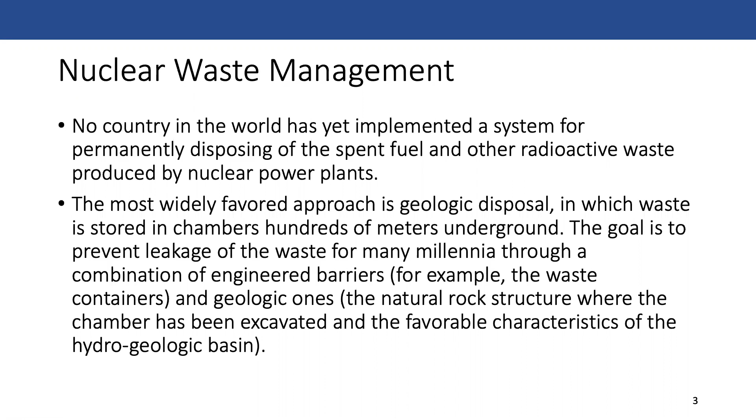But actually, the vast majority of nuclear waste today isn't being stored geologically. It's kind of just being stored on site. So they have these essentially giant swimming pools that house all of the nuclear waste. It's definitely a controversial topic, and one of the biggest problems is that no one really wants it to be close to them, and so it's been a struggle for the nuclear industry to figure out a permanent site to store the nuclear waste. So here's a schematic of a nuclear waste storage area.

Let's see. Okay, so there's a question. Oh yeah, a couple comments. Yucca Mountain. Yeah, that's the one that's being talked about a lot for nuclear storage. And there actually have been plans and developments of that site, but as far as I understand, it's not actually storing anything right now. And then another question: if we don't know how to deal with the waste, why do we still use it, other reasons than the energy needed? Well, that's probably one of the big reasons.

So there's a couple big benefits of nuclear. One, it's really clean. And two, from a technology perspective, it is able to turn on and stay on for a really long time. And because of the size of a nuclear plant, it produces so much power. It's really useful for what's called baseload power.

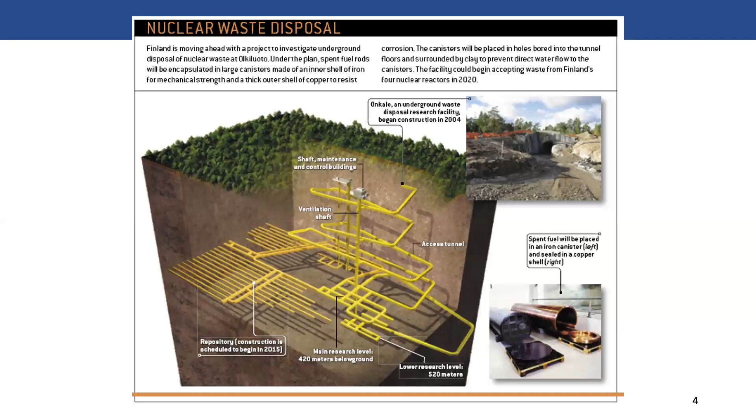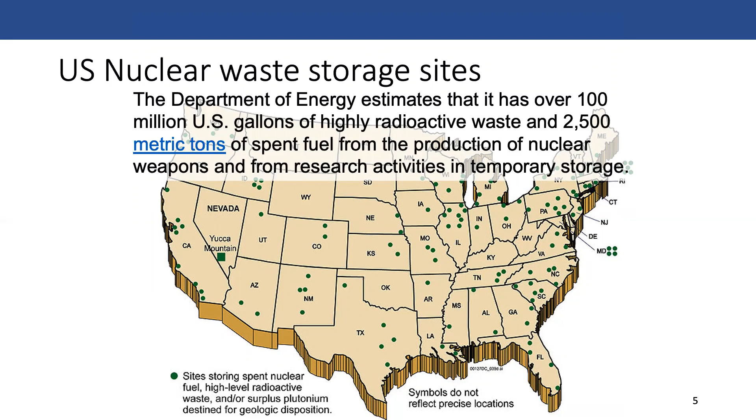So this is the one that I just mentioned, Yucca Mountain in Nevada. It was way back in the 1980s that it was designated as a nuclear waste repository. But even despite lots of money and many years to develop it, no waste is yet being stored. Definitely one of the most controversial aspects of nuclear power.

And I think whereas safety is somewhat of a concern from a public perception standpoint, I think nuclear in general is quite safe. But the nuclear waste handling is probably a perception piece that is kind of reflected in reality. And so because of public backlash, it's been difficult to try and open Yucca Mountain, and actually the Obama administration decided to terminate the program while looking at other waste sites.

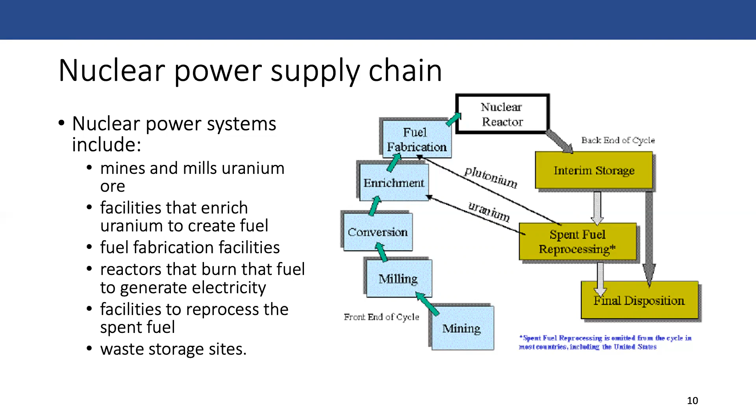So, pathways from going from nuclear power to nuclear weapons. If material gets stolen in certain parts of the supply chain, that can be a risk. You can also covertly sell the material, or divert a little bit of it, and that can be pretty difficult to keep track of, especially if it's like a government level operation where you are promising not to build weapons, but you're in charge of managing the overall nuclear power.

And then there are some scenarios that people are worried about where if you've signed on to the Non-proliferation Treaty in order to get nuclear technology, to produce power from nuclear, you use that to stockpile some of the material, and then you just renounce yourself from the treaty, and use the technology you gained. So that's an additional worry.

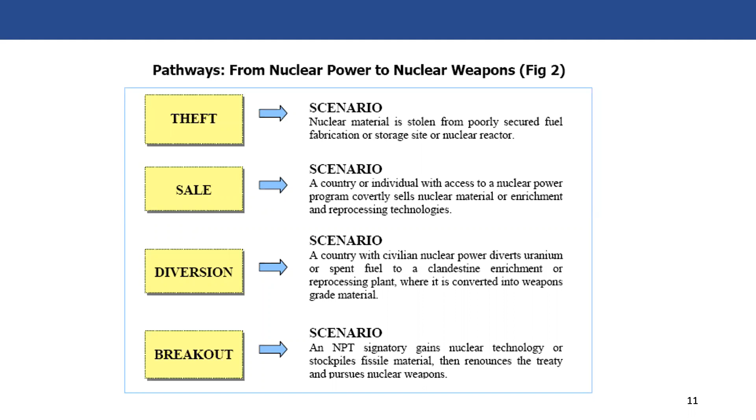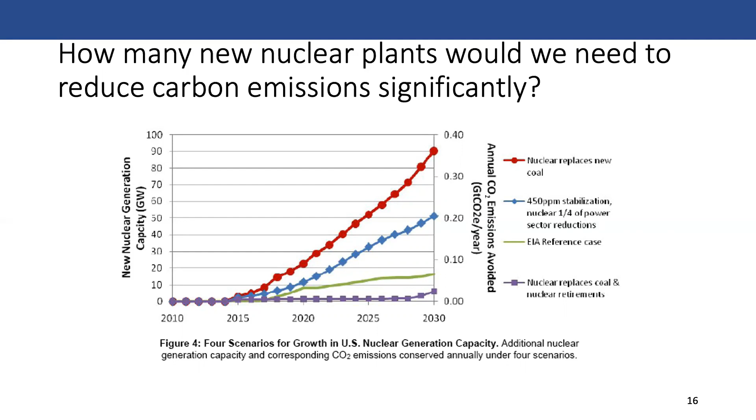In terms of how many new nuclear plants are needed to reduce carbon emissions, there's a couple different trajectories, and I guess we don't have to get into so much detail about what all the trajectories look like, but I will say that when you look at reports from like IPCC and similar types of things - for example, this next slide is a DOE scenario for a low carbon future - basically, all of these futures that people are looking at suggest that we need a lot more nuclear in order to achieve our climate targets.

The reason why that happens is you have a pretty hard time being able to provide electricity just from wind and solar and from renewables, where you do want a low carbon future, because of the intermittency issues where the sun doesn't always shine, the wind doesn't always blow. So you need some sort of stable power supply, and the one that's easiest to turn to that is totally clean is nuclear power, despite that it has many other drawbacks.

So this is just one example, but many projections of getting to low carbon futures have pretty significant developments in installation of new nuclear power. And that's definitely the opposite trend that we see happening these days.

Like I was saying, in Japan, for example, they've shut down the nuclear plants, although they're trying to get back to some of them. And then in Germany, for example, they've shut down their nuclear plants. And in California, even in our state here, we have shut down a number of nuclear power plants over the last decade or so. Actually, there's only one nuclear plant left in California.

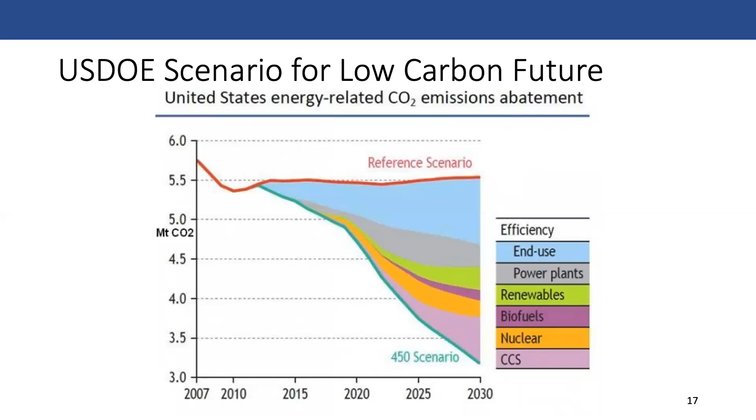When it comes to thinking about the technology, there are pretty different views for nuclear. So in the Obama administration, they wanted to really be able to look at all options and gauge what makes the most sense, guided by science. The Trump administration actually does also support nuclear, but I think it's more just on a technological basis. They want to revive the coal and nuclear industry.

The Federal Energy Regulatory Commission, which we'll talk a little bit about today, there was a nuclear plan that was put forth by the Trump administration and was rejected. This particular incident was to bolster coal and nuclear power plants with subsidies, and that was proposed in January, two years ago.

Essentially, it didn't really make much sense to do this subsidization, and as a result, it failed to pass the Federal Energy Regulatory Commission, which is in charge of developments in the electricity sector. So you can take a look at that in more detail. I have a link here.

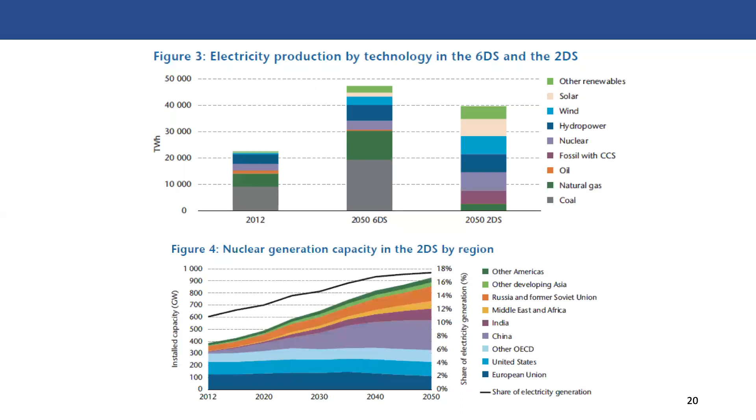So is nuclear green? The Breakthrough Institute has suggested that it's one of the best things to address climate change. You can rapidly scale it up. It's lower cost than renewables — maybe I might disagree a little bit about that one, especially these days where particularly wind power is quite a bit cheaper. It may still be technically economic over the course of its entire lifetime, better than solar. But again, those numbers are changing, and it's not only about the marginal cost, but the difficulty in installing new capacity is so big. If you remember from last lecture, these things are taking decades to build now, and that's an important consideration as well.

Others still see renewables as the best route to a near zero carbon energy system. But again, these things aren't so black and white. I think there's not really a silver bullet, and you'll probably need a mix of everything to get to what we need.

Okay, so that's a wrap up of nuclear power. So let's go ahead and dive right into the electricity grid. There's a lot of interesting stuff to talk about here.

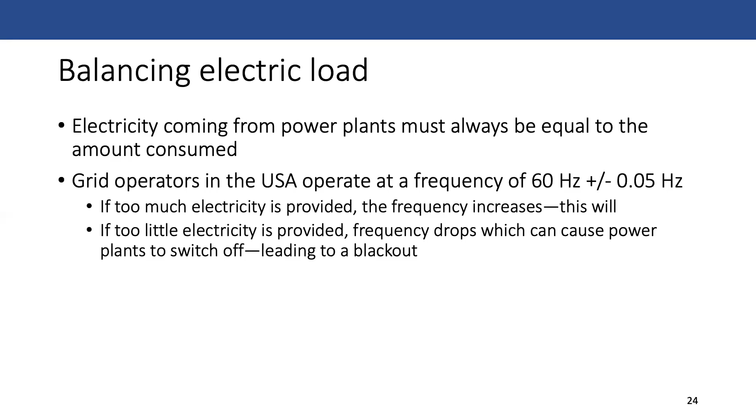And then as folks wake up, turn on their lights, go to work, turn on computers, turn on your air conditioning, all that good stuff, your electricity demand will increase over the course of the day, and then will sort of decrease over time as you wind down. And then you've got this sort of cyclical process.

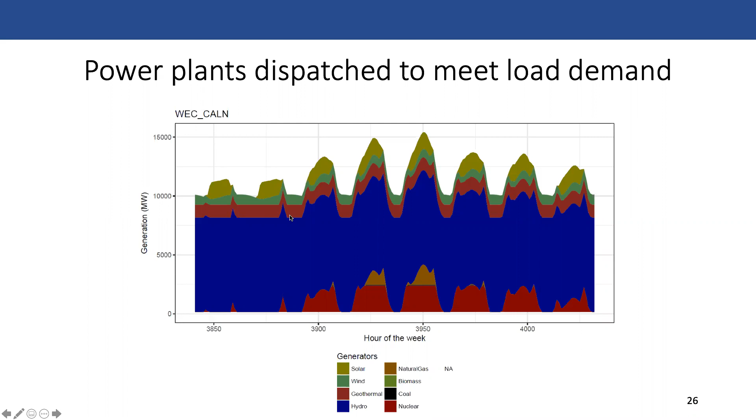Okay, and so as I was mentioning with the solar and wind, what does this mean for renewables, right? The sun doesn't always shine and the wind doesn't always blow. And so in order to provide energy, we have to employ other sources of electricity. So how are we supposed to deal with this issue? One is that you have to employ other sources of electricity generation. And that kind of begs the question, well, how do you cut out fossil fuels then if you need other sources? And so nuclear, for example, might be one possible way to alleviate this issue that we call intermittency. The other way is that you use energy storage.

So one other issue that I want to talk about with renewables is something called net metering. And so this is a concept specifically for distributed energy. So this is talking about like solar that's on your rooftop as opposed to the big utility scale solar.

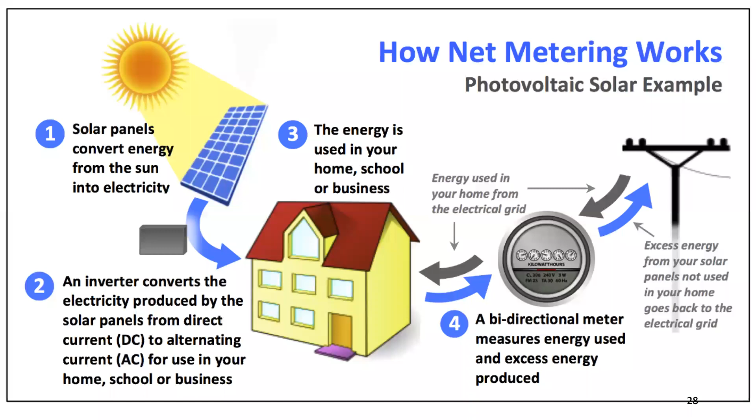Yeah. Okay. So going back to this net metering. Essentially, what this does is it's reducing the demand of electricity that's needed to provide power. And that has led to a pretty interesting issue, which some of you may have heard of before. And so this is called the duck curve.

So I was showing the load duration curves earlier. So this is a load duration curve for a single day. And you may expect it to look, if you remember, something like one sort of peak followed by one sort of trough. But what has ended up happening in California is this sort of phenomenon. We call it the duck curve because it apparently looks kind of like a duck.

So with net metering, what ends up happening is that you reduce the effective demand. And so this is a real net load curve from the end of March every year. In 2012, it looks something like this. And then more and more distributed solar, so solar on people's rooftops, was getting installed over time. And so the amount that they're demanding from the electricity grid decreased in 2013 and then decreased in 2014.

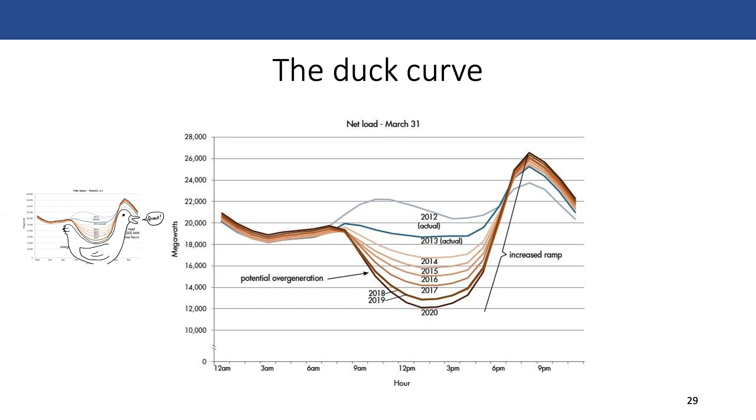But actually now you are forcing the grid to deal with some pretty interesting issues. So here the demand starts to fall really quickly, and what that means is that you've got a whole bunch of power plants that are on, and suddenly solar is getting introduced into the system, and you need to start turning those power plants down. And then you have probably an even bigger problem where all the solar starts disappearing and the demand ramps up really quickly again, and now you have to turn these power plants on.

And so why is that an issue? Power plants have what are known as ramping capabilities. It takes a different amount of time to turn on a power plant and to ramp up or ramp down a power plant. Gas turbines are pretty fast to ramp up. So we can see here, for a gas turbine, the relative time it takes for it to ramp up to its power capacity is relatively quick, as opposed to a steam turbine, which is relatively slow.

And so why is that? With a gas turbine, you basically pressurize the gas, send it through the turbine, and combust it, and you're kind of good to go. Although there are issues with the temperature that it's operating at. It could take time to heat up, and so it's not necessarily instantaneous.

Okay, sorry. There's a question: is the y-axis on the duck curve the solar energy or the power plant? So this is the total demand from us, from the general population, and it is being provided energy from the grid. So this isn't referring to production of solar energy or power plant energy. It's what we demand.

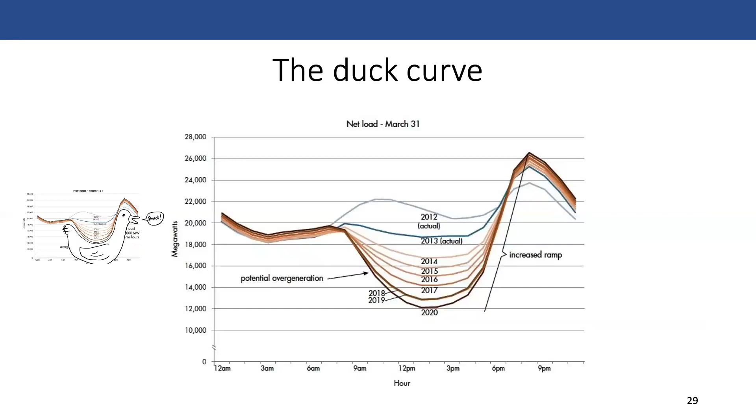And then the other thing is that when your power plants are operating in these flat areas, right, at their capacity, they actually are designed in a certain way to be operating most efficiently. When the power plant is ramping up and down a lot, you actually have a lot worse emissions.

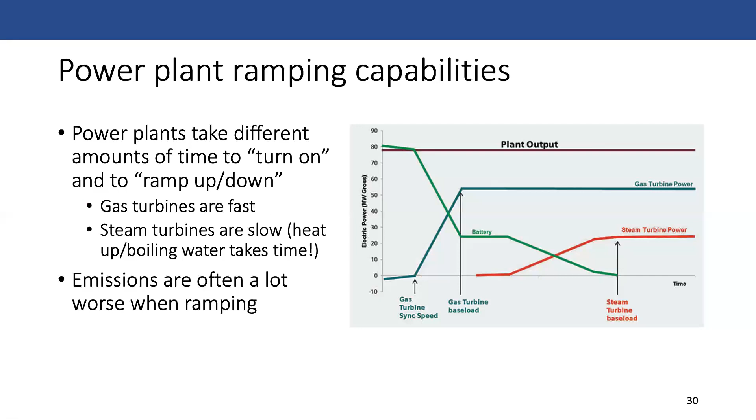And so the reason why that was happening is because you would start to need more and more power plants ramping up and down to meet that. And so you ended up getting higher, in this case, NOx emissions, so nitrogen oxide emissions.

And so I definitely don't want to be sort of disingenuous here. This is kind of a more extreme example, and it's not often that you have higher emissions with more renewables, but it is something that can happen. And these are the types of things that we want to be sort of cognizant of and keeping track of.

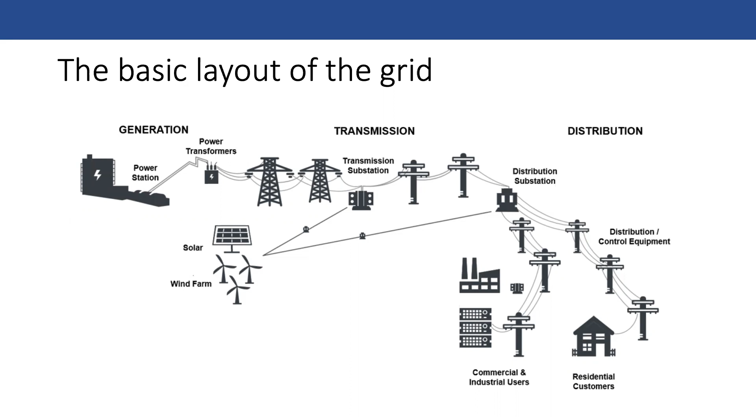Okay, so let's push on ahead. So going back to thinking about the basic layout of the grid, now that we have a better understanding of some of the operational aspects, I want to go into a little bit more detail about each of these sections in generation, transmission, and distribution. So I'm not going to go so much more into generation because we've already talked about power plants at the individual level. But I do want to revisit a little bit of stuff here.

So this is a diagram that I've shown before, showing where all the power plants are in the country. And so again, the color denotes the fuel type. And so you can see some trends I'll point out. The Pacific Northwest is really well known for having lots of hydropower, so that's in the green, and their dots are actually pretty big, which indicates the size of the power plant, the capacity.

In a lot of the more dense population centers, we have a lot of pink, which is solar. So you can see that on the West Coast and on the East Coast. It's definitely better on the West Coast in terms of the sunlight that's available. And so these ones operate at higher capacity factors often than the ones over here.

In gray, you will see a lot of that happening in the middle of the country. And if you remember back to the renewable resource lecture, a lot of the stuff in the middle of the country has high wind resources. So the gray is wind, and the reason why you see a lot of it happening here is because of the availability of wind in that area.

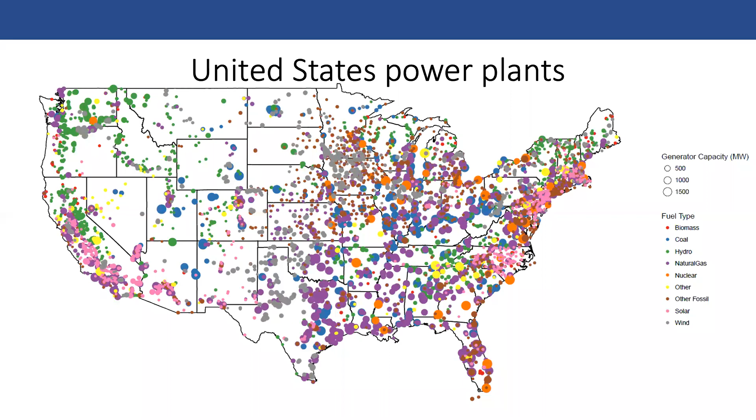So normally we would have this little game that we play, but I unfortunately couldn't figure out a good way to do that online. But the main gist of the game is if everyone is a power producer, so if we assign you to be a nuclear plant and another person to be a natural gas plant, another person to be a wind plant, and then solar power. The order in which you turn on is based off of something called economic dispatch.

So if you are a nuclear plant or a natural gas plant or any power producer, you operate in a special type of market. And essentially how that works is you say, I promise that I will produce this amount of power for X dollars. And then someone else will bid into this market and say, well, I will produce this other amount of power for Y dollars.

And what ends up happening is all these bids go into a central operator. In California, that operator is known as the California Independent System Operator, the ISO. So we call it CAISO, the California ISO. And that independent system operator actually operates in Folsom, pretty close by to us, and they take in all of the bids, and then they will order them in terms of the bids that people are making.

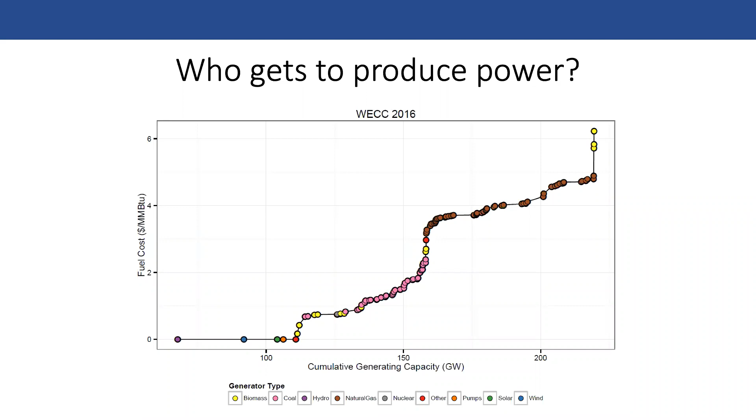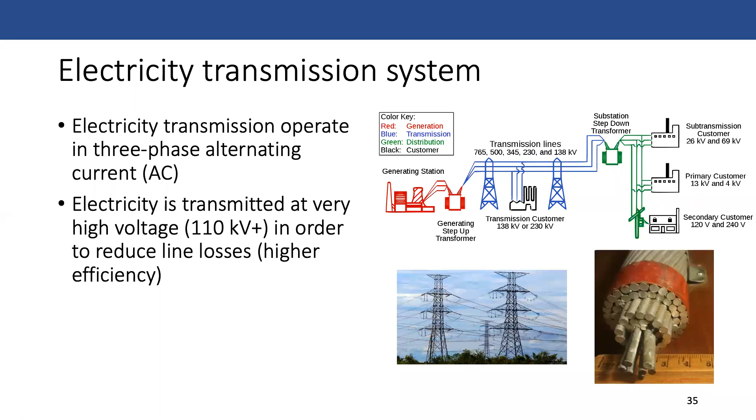Okay, so that's enough about the generation operation aspects. So here we'll talk about transmission. Nothing too detailed here. Electricity transmission operates in three-phase alternating current. It's transmitted at really high voltages, 110 plus kilovolts, so 110,000 volts. And you do that to reduce line losses. And they're pretty serious cables. This is an aluminum cable that you would typically see in these systems. And the way you get it up to the high voltage from the generator is through what's called a transformer. Transformers are going to step up or step down the voltage. That's essentially what the equipment does.

To give you a sense of what the transmission grid looks like in the United States, there's about 160,000 miles of high voltage power lines. There are essentially three independent interconnections in the continental US.

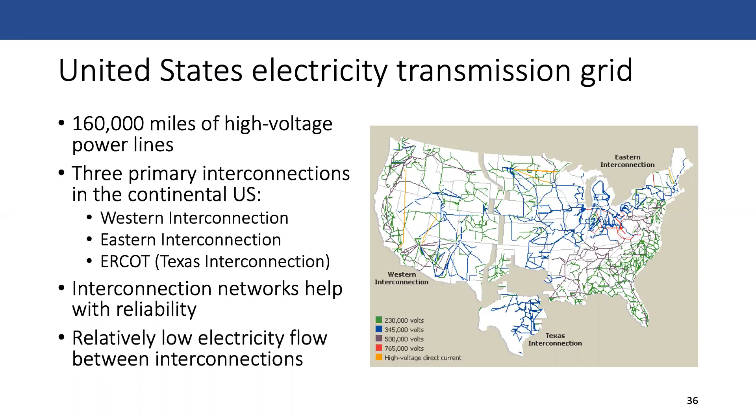You've got the Western Interconnection, the Eastern Interconnect, and ERCOT, which is the Texas Interconnect. Texas has basically its own grid. Everything within that interconnection helps with essential reliability, and you don't get much electricity flow between the interconnections. You can almost think of them as their own sort of electricity grid. There are interconnection ties which allow for electricity flow between interconnections, but it's really low quantity and pretty unusual. When we talk about modeling and looking at this type of stuff, we typically treat these as independent.

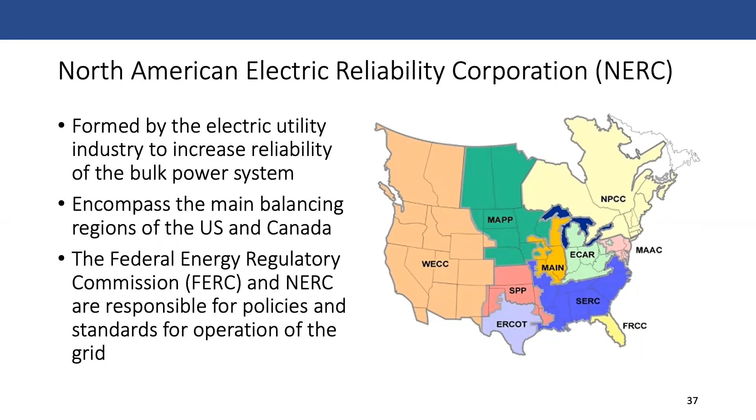There's also a reliability corporation formed by the electric utility industry to increase reliability of the bulk power system. This separates the interconnect, at least the Eastern Interconnect, into what are known as balancing areas. The NERC regions, along with the Federal Energy Regulatory Commission, are responsible for setting policies and standards for operation. So a lot of the rules that happen are formed by this corporation of regions, as well as the Federal Energy Regulatory Commission.

So then zooming in on the last third of the electricity system pie, thinking about the local distribution system. This is all the stuff you're basically seeing in the neighborhood. It starts at the substation, where the big transmission lines transmit electricity into these substations that have step-down transformers which lower the voltage.

There is one substation in Davis. I don't know if any of you guys have gone by it. If you're driving to Target from downtown, you actually pass by it. It's on L Street, between maybe 3rd and 1st Street, off on your right-hand side.

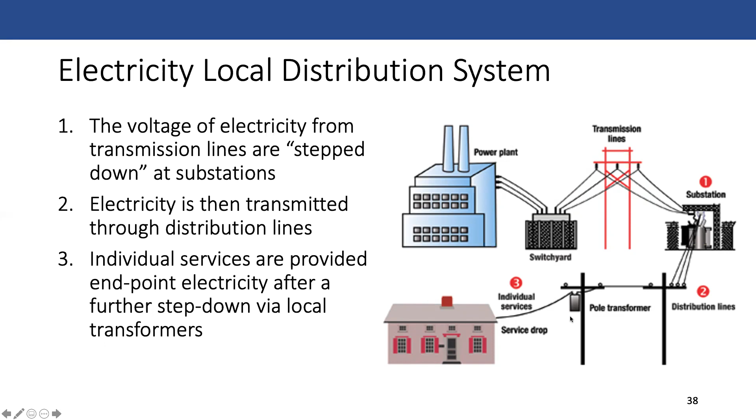Individual services are then provided electricity by distributing from the substation through distribution lines. Those are the wooden poles, and then either pole transformers—those are the silver or green cylinders you see—or transformers on the ground, which would be these big green boxes. I think most of you guys are familiar with seeing this sort of infrastructure around.

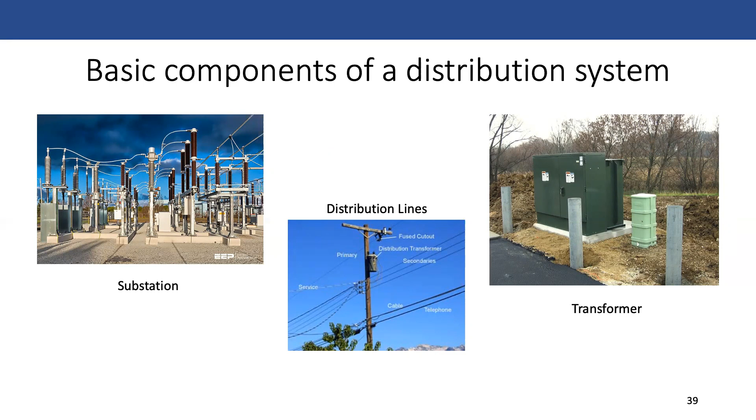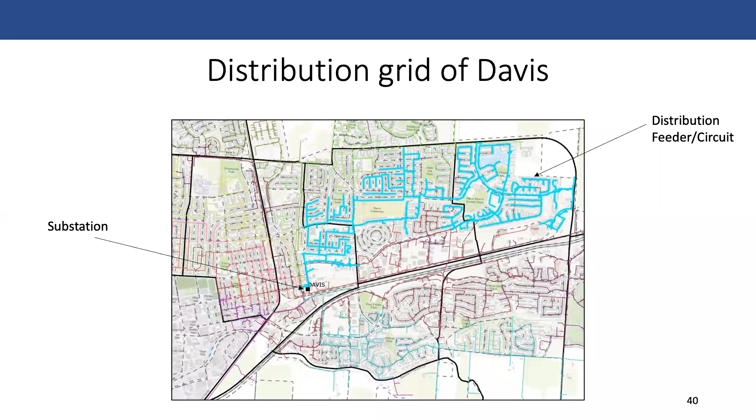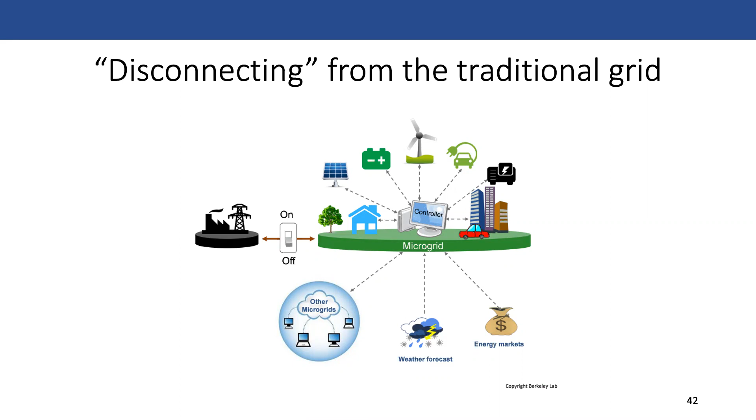Okay, I wanted to talk following this primer on our electricity grid about the fascinating world of electricity regulation. We are starting to wrap up our discussion about basics of energy technology, demand and supply, and thinking about how it gets produced, how it gets used, and starting to tie it in more with policy and regulation. That is the aim of this course. As we've set some of these foundations, I think we're going to start to dive more and more into regulatory issues and policy issues. This is a good place to start off. It's an area that's really rich in issues and regulation. You do have to know some of the basics of how it works in order to have a meaningful conversation about a lot of the policy aspects, and hopefully we've built that up by now.

When it comes to electricity regulation, it's a pretty rich area of discussion, and there are a lot of stakeholders involved. Everyone everywhere from government—legislature, regulators, and on the more local level, municipalities, county or city level government—are involved. Obviously utilities, so we'll talk a little bit about what it means to be vertically integrated versus competitive. The folks who own generator assets, and that's not the utilities, who are often forced to divest from generators. You've got vendors, customer groups, and NGOs. All of these are important stakeholders in understanding electricity policy.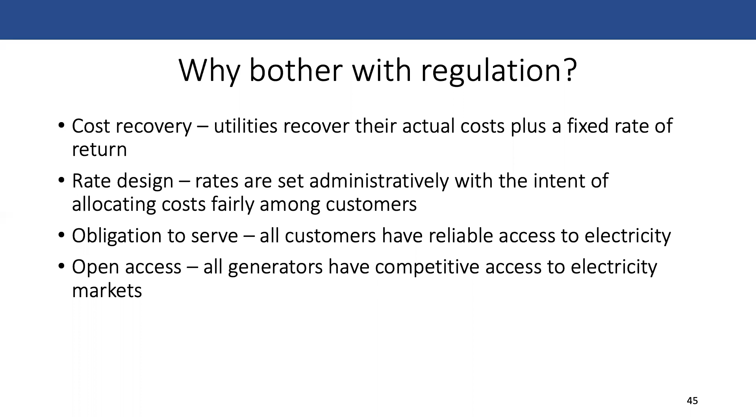This has been a really hot topic for the last 20 years or so: electricity market restructuring. So before restructuring, also known as market deregulation, you would have a single utility able to own all three major aspects of the market: generation, transmission, and distribution. PG&E used to own the power plants as well as the transmission and the distribution.

You can probably see potential monopoly issues with this, right? Because if you own all of the infrastructure, you can dictate the terms of how much things cost to provide through the system. So when PG&E was able to own all of this, we had what was known as a regulated market. Because they owned all of these and we didn't want them to be just a monopoly, we set really strict rules about the rate structure, and some operational constraints on the different aspects of the electricity grid.

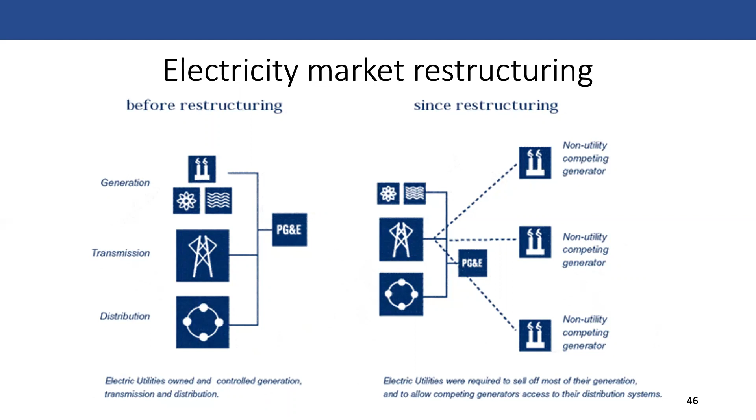Okay, so backing out again up to a high level in terms of policies. When we think about the types of environmental policies we care about: promoting renewables, decreasing emissions, demand side management - this is demand side management really on the side of consumers, essentially reducing energy use - and then the last one, electrifying transportation.